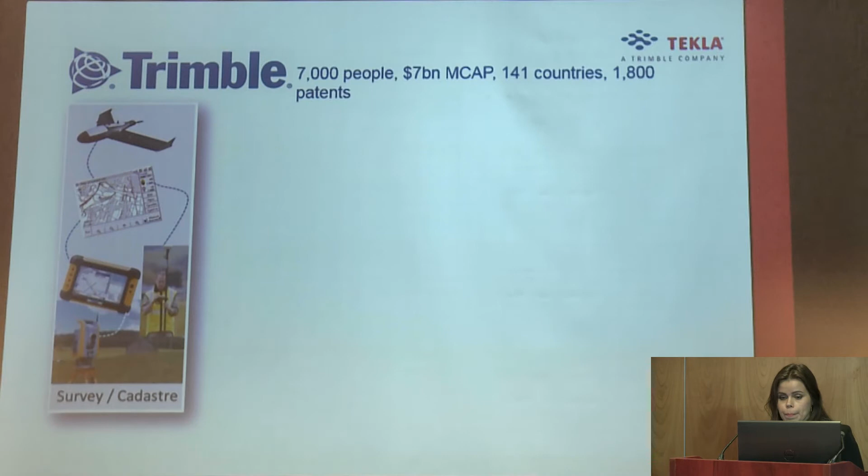So first we'll just talk a little bit about Trimble, which basically owns VICO and Tekla. It's a very big company in the US. They are actually mainly known in Europe as a hardware provider. They have a lot of hardware, and in recent years they have bought a lot of software. So they have heavy civil, agriculture, surveying, and GPS devices. Now they're trying to combine the office and field for construction, and they're really trying to focus on capturing the data on the field and bringing that to the office and to the job site so that there's some benefit from having the 3D models and all this data.

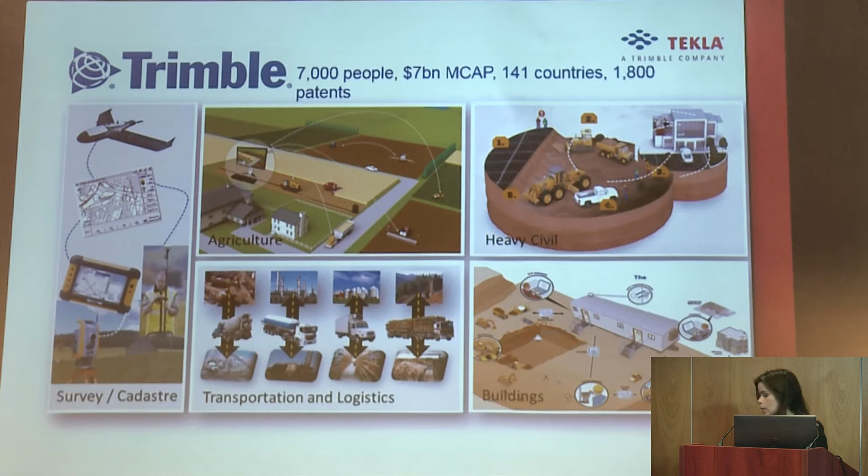So we will be concentrating on the building side of Trimble. Vico Office is probably not a very well-known software yet over here. It's actually originally developed in Finland, and we have many large companies that use it in Scandinavia as well as in the US.

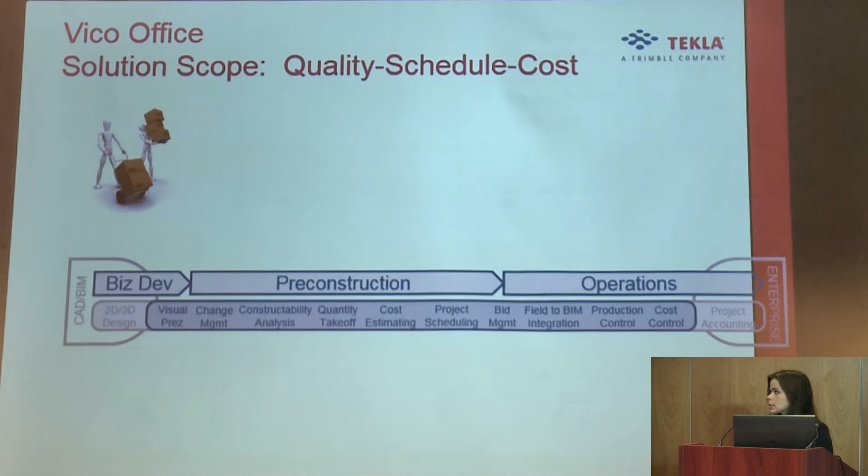And we talk about the solution scope. How much do we do? We actually cover a lot of ground. So if you're talking about bringing Vico Office into business development, we can start from high-end cost estimation and work all the way to cost control and be the link to project accounting. So we can basically replace 5 to 15 different software. And the nice thing about Vico Office is that everything is integrated. So if you bring in a new 3D model, our cost and schedule is automatically updated because everything is integrated, since we get all of the quantities from the 3D model. So we have constructability analysis, quantity takeoff, cost estimation, scheduling, and we can even link to field devices like the Trimble Total Station.

I think one of our best features is production control, actually making sure that the schedule you did is going to be the schedule you finish with. So you're constantly controlling the schedule to stay on course. You're steering the ship before it even hits a rock or anything bad happens.

So there's a lot of data, and we always want to make sure that it's available and on time, and it's actual, and everything is integrated, and different areas in the office or in the field can use different parts of Vico Office.

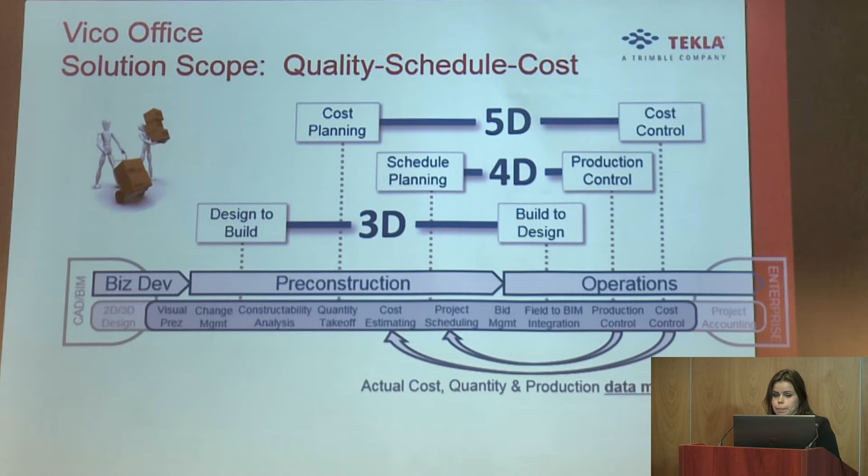I'll talk a little bit about how to combine VICO and Tekla as well, since Trimble's strategy in the long run is to integrate a lot of their software and hardware. We can also already work with VICO and Tekla together.

We can bring in the 3D model from Tekla, and then we extract quantities from the Tekla model. We create locations for location-based scheduling, which we'll talk more about in a minute. And we then link that information to cost as well. And we create tasks to make a schedule, and then we can even visualize it in 4D.

Then we kind of combine forces with Tekla. After that, we can do the general scheduling and controlling. In Tekla, you go into the object-based, weekly installation order, so you use Tekla in the specific way that it's meant to do. Vico Office is more of a tool for everybody, and we go into the general level of things.

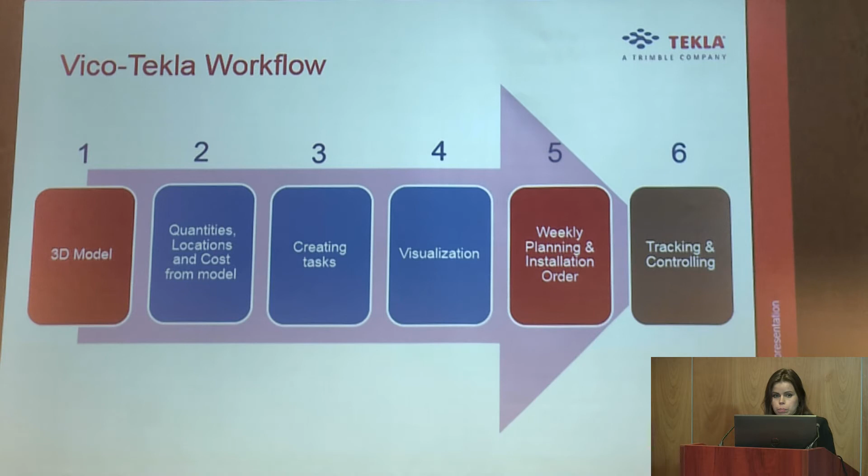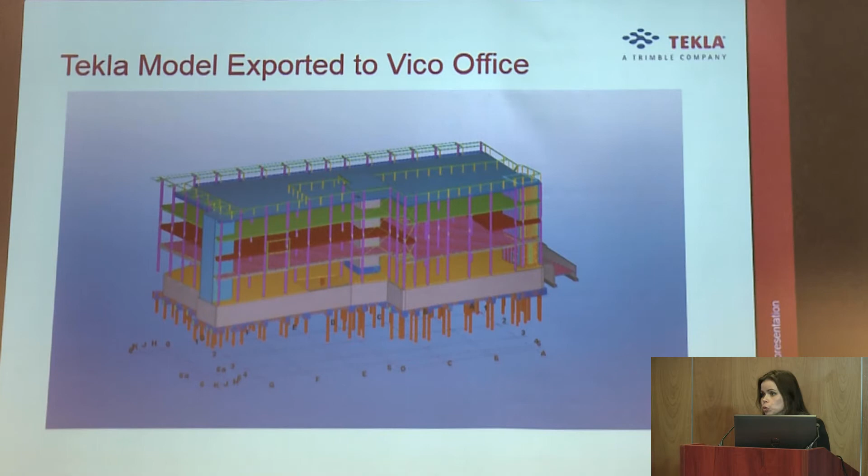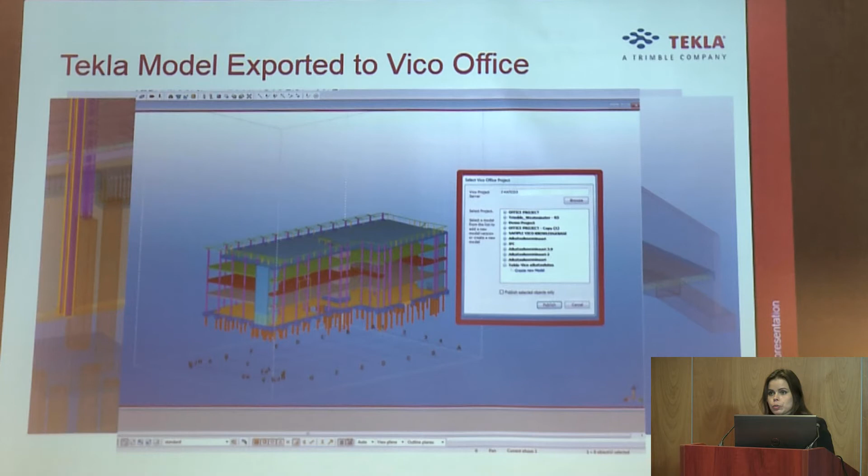So let's go see how this works. Here we have a Tekla model, and that's basically exported to Vico Office. In Vico Office, you can also use ArchiCAD, Revit, or IFC, so you don't have to have a Tekla model to use Vico Office. After it's sent to Vico Office, to the specific project that you want, it's opened in there, and we start extracting quantities from the model.

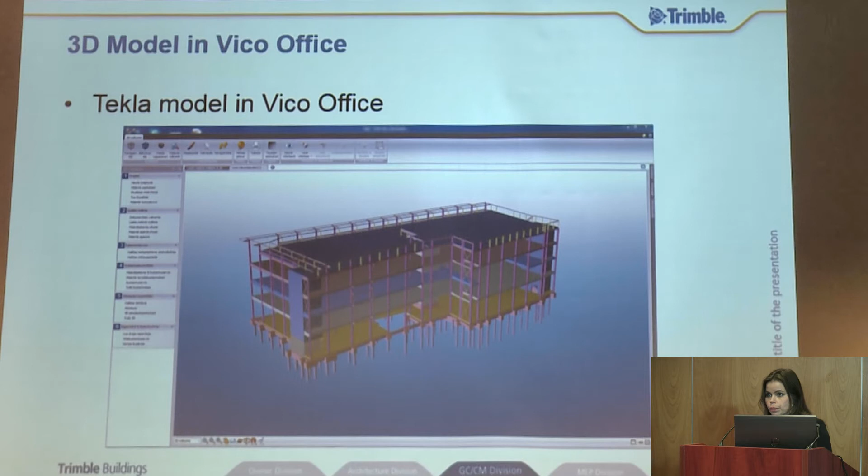Also, one of the best tools, I think, in Vico Office is something we just spoke about: how do you detect change? Managing change is something VICO does very well, and it's a handy tool. You can also bring PDFs to the document controller, and you can visually use a slider and see these differences. Trying to do this on a piece of paper is a little bit more difficult.

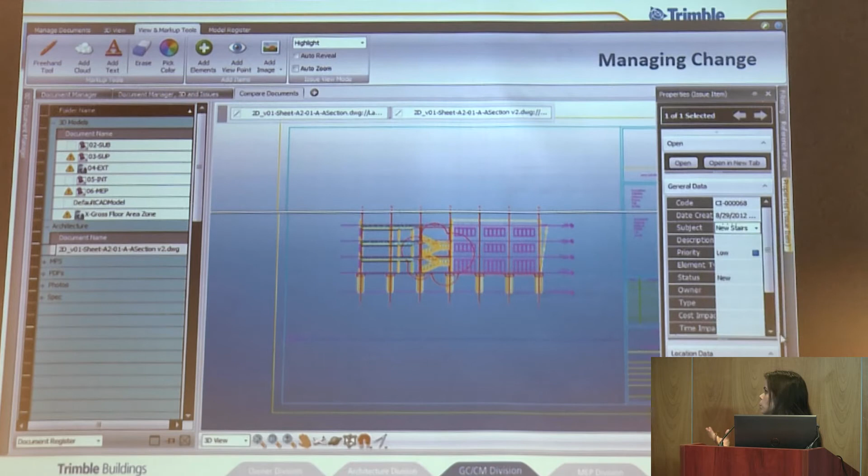So you can just mark it with a cloud, and it will automatically take a snapshot and create an issue out of it. And then you can come back to it later and see, okay, was that approved? Is it in cost? Has it been scheduled? So this is a great way to manage change and use as a collaborative tool.

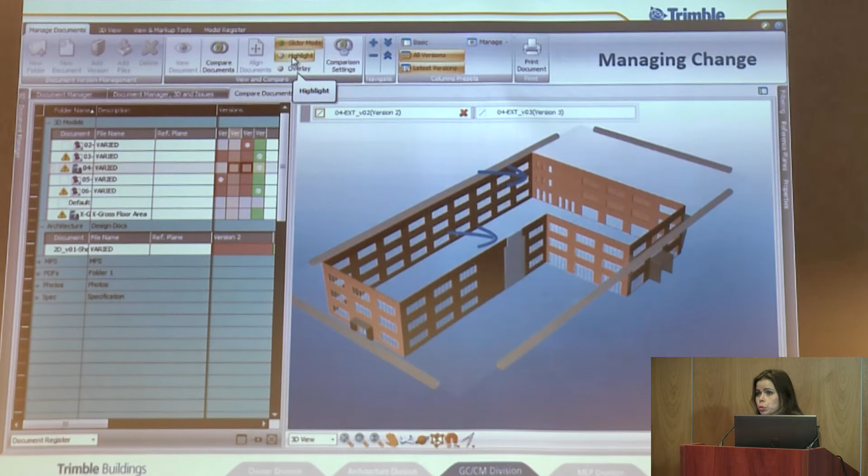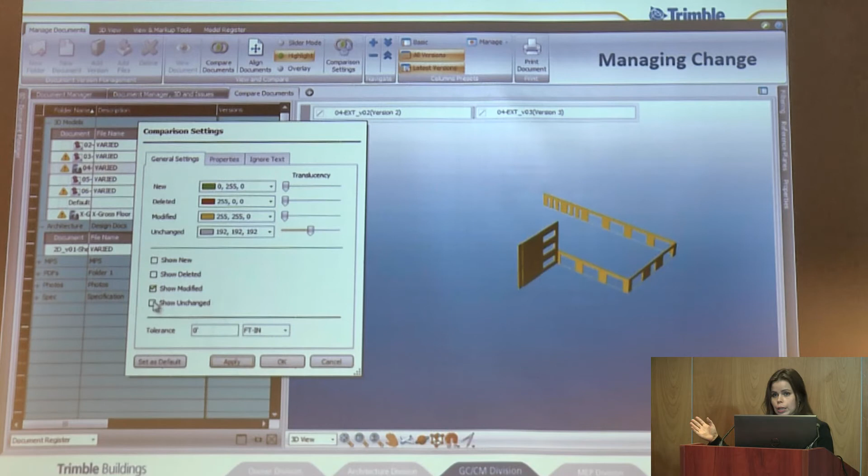In addition to this, you can compare 3D models. So if you have two versions of a 3D model, you can use different modes to visually check. This is a great tool, again, in a weekly meeting, explaining change to an owner or a person who might not understand anything about drawings. Here you can see in different colors: red means something was deleted, green is new, yellow is changed. And again, all of this, you can take a screenshot out of it and create an issue.

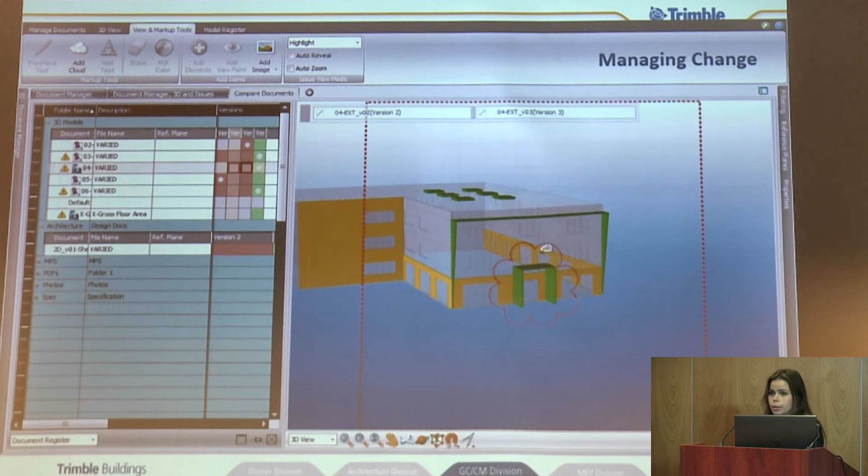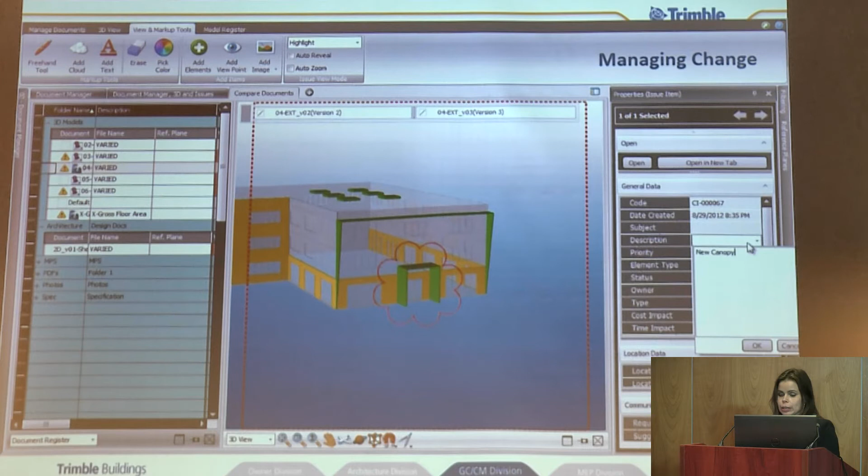So this is a data bank for all of your PDFs, 2D documentation and 3D models for that project. And again, you create an issue out of this, and it will be in the issue list, and you can come back to it later and make sure that this is taken care of.

And just a quick screenshot about if you created an issue, you can assign it to a person. You can even create a little chat or discussion saying, okay Mike, did you check this? Yes, this is approved. So you have little timestamps to see how something was handled or if something was taken care of.

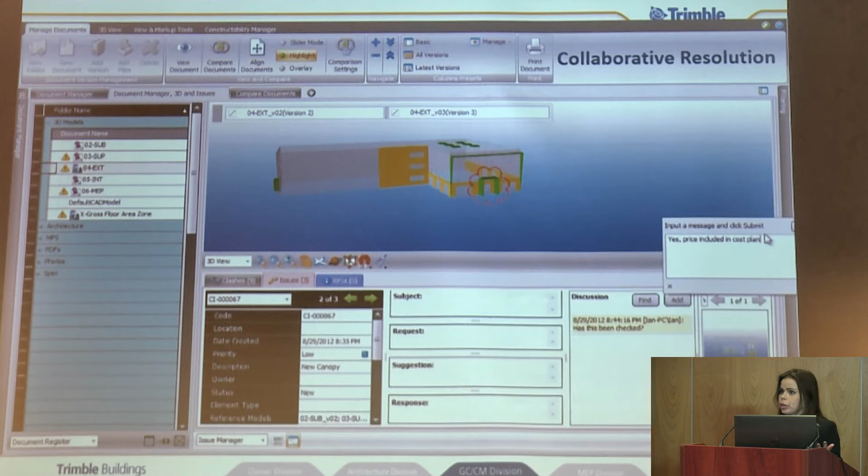So after you check the different versions of models or PDFs, then we want to start extracting those quantities from the models. The elements we get from the model provide us the geometry we need to calculate the quantities. We just don't, for slab-on-grade for example, count that there's one. We want to know how many square meters, how many cubic meters, everything that we can calculate from that specific element. And we link that data into our cost plan.

And this costing data is something that you can have as a reference project, basically, where you can have a recipe database for how to make something. Because at VICO, we try to find those things that you can actually reuse on most projects you have, because a large part of what you do every time you bid a job is basically the same things. Every job has a substructure, it has walls, so we're trying to reuse that information we used last time, so you can create a cost database that you can use to link to those quantities from the model.

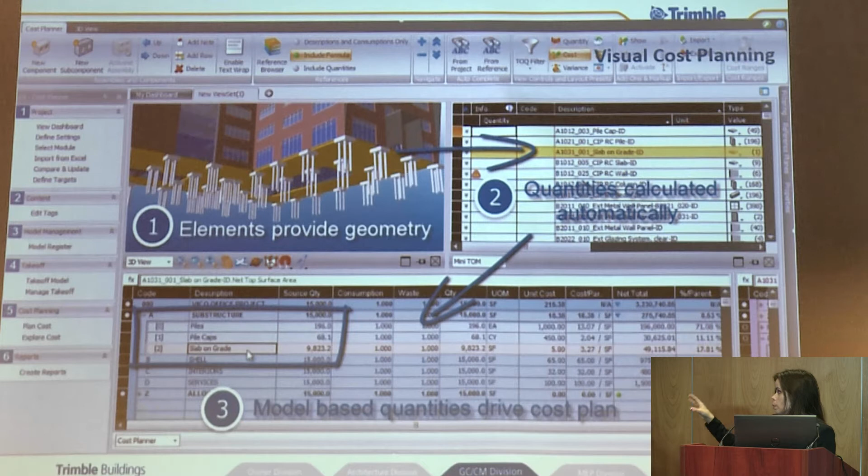In the next screenshot, you can see how it's done. So if I have highlighted the foundations over there, it will show in the model what has been linked to the foundations, and you can see those items. Those are different elements that are linked to the model and also to the cost plan, and you can see what kind of quantities are linked. So this is cubic yards and square feet. Those are the items that we're using to drive this cost plan.

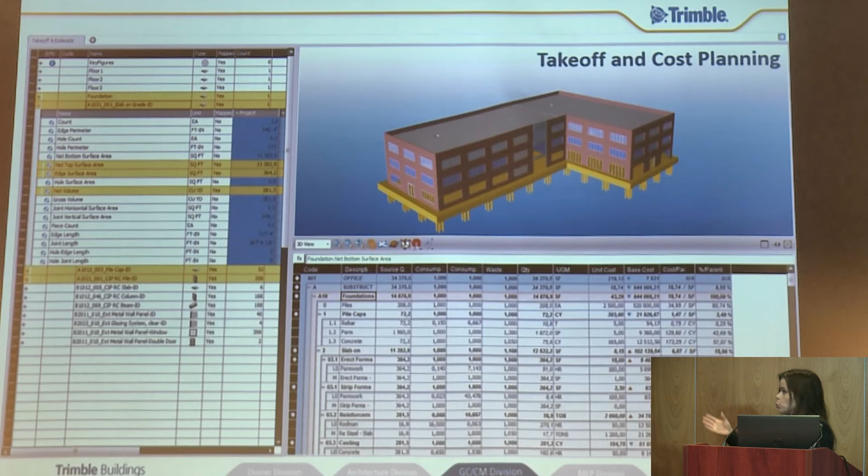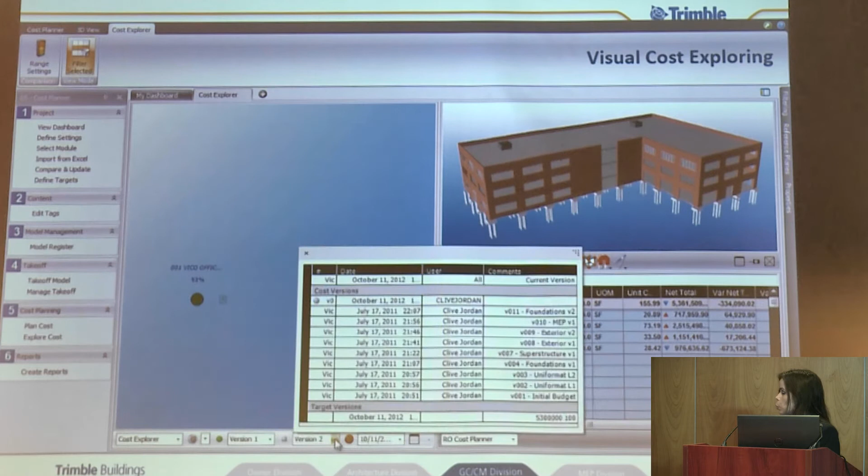So one of the other features that a lot of owners and people like to see is what kind of differences there are in different models or cost versions. Because in Vico Office, you can do multiple cost versions. You can bring in another model and create another version. So then you could compare and see which of those model versions is more expensive, or you can compare it against your budget. So we have a little green light, red light thing going on here.

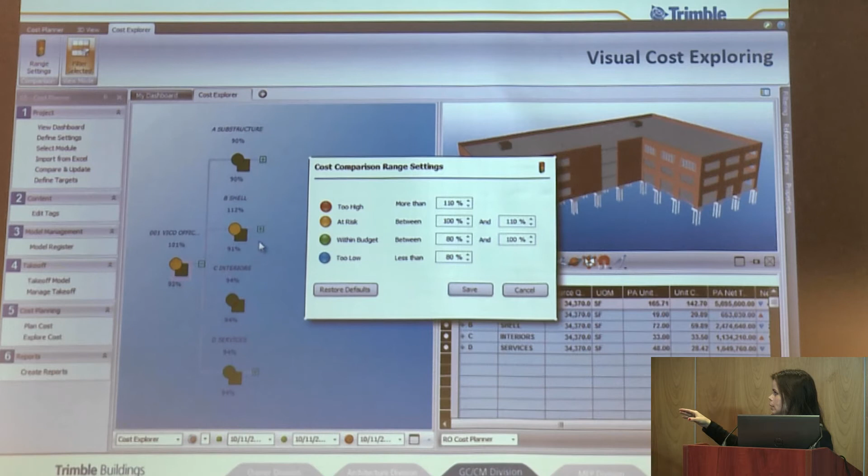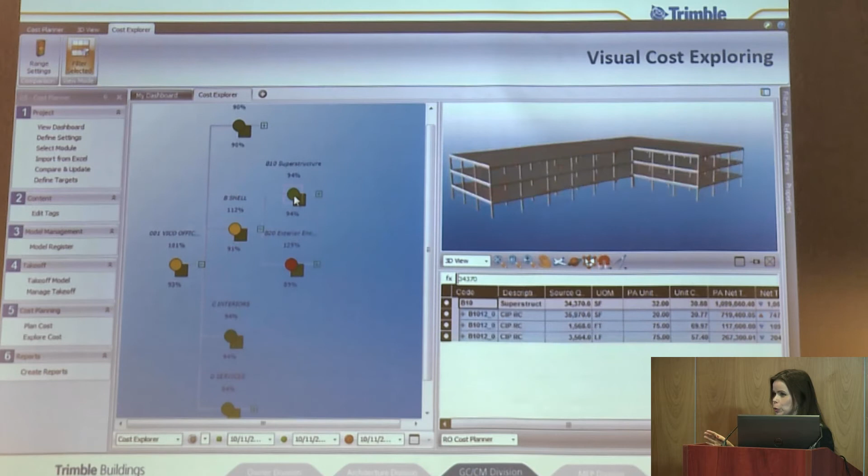So basically, this is just like a tree structure. You can go, you have the whole project. There's something in yellow, let's go see, there's something in the shell of the project that is telling us that we're over budget. Yellow is not really that bad yet, but let's continue. If it's red, you know that you're over budget. So you can continue, and you can see that there's something in the exterior, and you can go to the specific item and pinpoint the line that is causing you to be over budget.

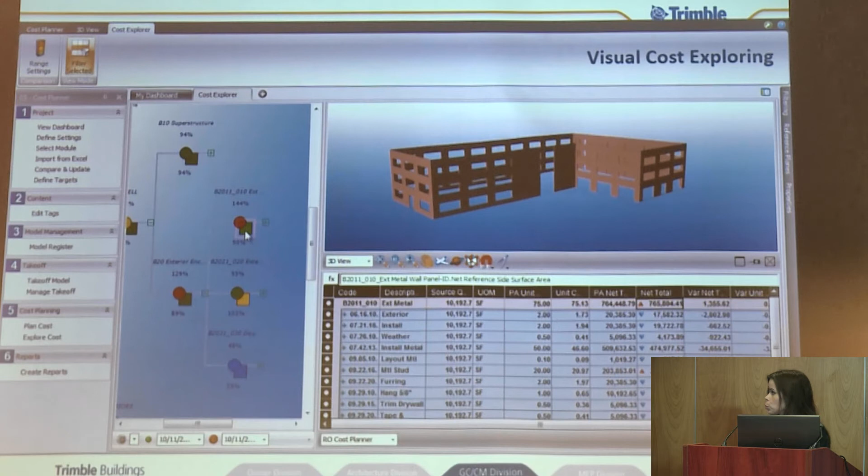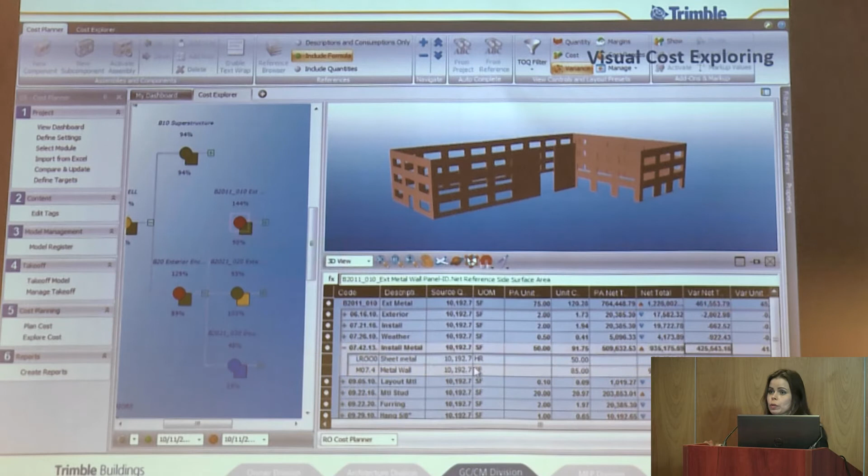So again, this is a great visual tool, but also you can see the numbers. You can see that, okay, the exterior metal walls were causing this for you to be over budget, or this version to be more expensive.

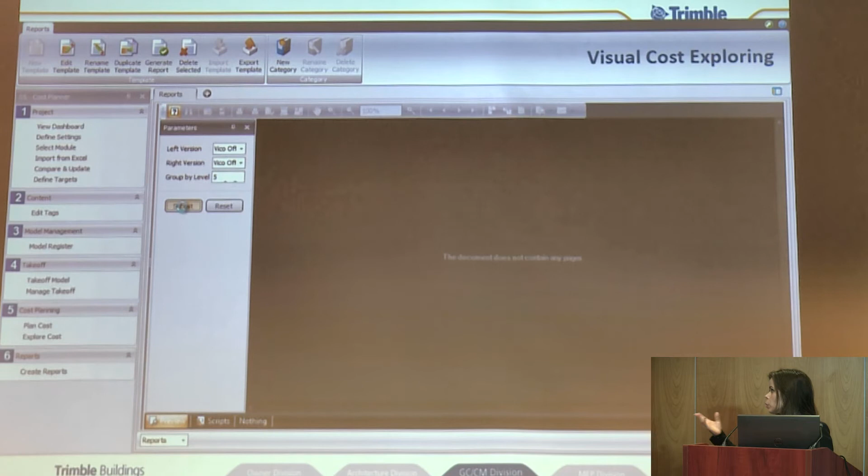This is a tool to dig into those differences. I think one of the great features in Vico Office is reporting. We have a reporting engine that you can basically use to create any kind of reports you want. Over here we have a sample report where you can compare two different versions of a cost plan.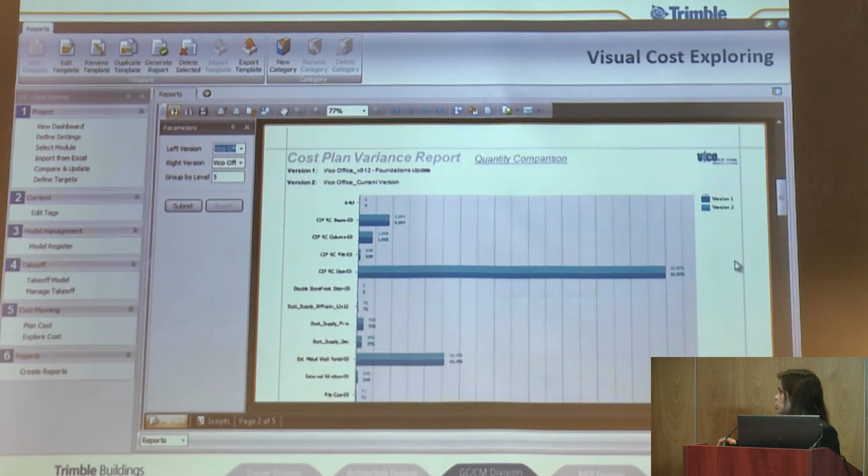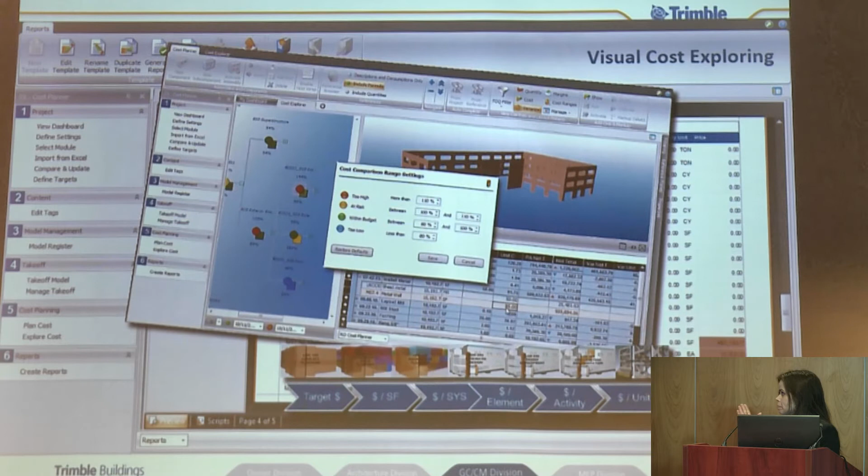You can run this in PDF or take it out to Excel, so you can hand this out to anybody and say these are the quantity differences, these are the price differences. Red again is over budget, and the sky's the limit with our reporting. Those are just some examples of what you can do with our reporting engine.

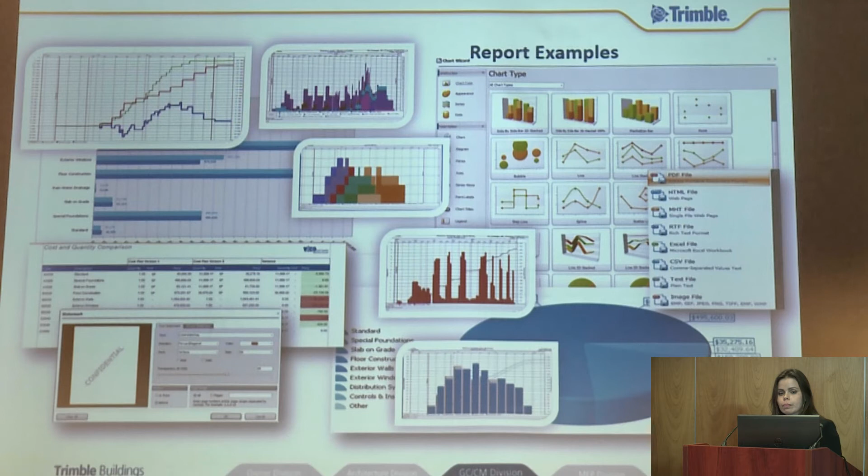So now that we've looked at the models, detected some change, and linked those models into our cost plan, the next step would be to do some scheduling.

In Finland and Sweden, for many years, location-based scheduling has basically been the standard. Is location-based scheduling or flow line scheduling familiar to anybody? No? Okay, well I guess not. Nobody knows flow line scheduling or location-based scheduling, even in the universities? Okay, well then I better explain.

Location-based schedule planning is not a new idea. It was actually used to build the Empire State Building. For some reason it was forgotten for many years. The idea is to cut up your project, instead of thinking of it as one big box, into sections, areas, and zones. The goal is to create work that is continuous and flowing, instead of having little jobs here and there with stops and starts, which seems to happen a lot on job sites, I've heard.

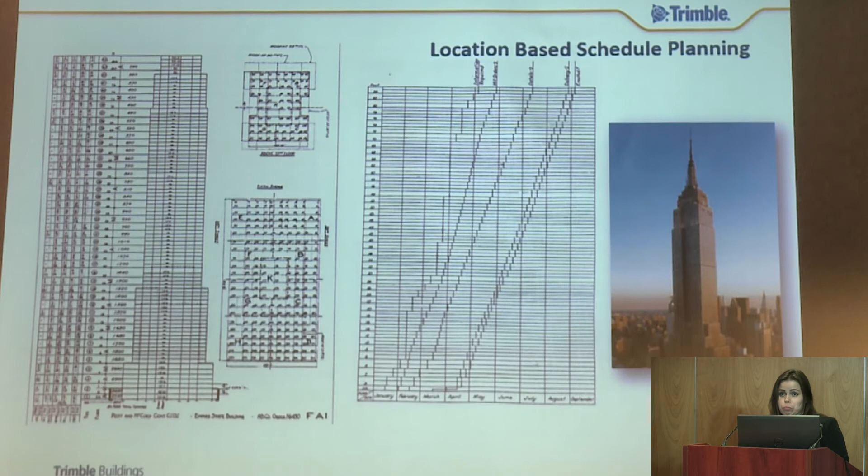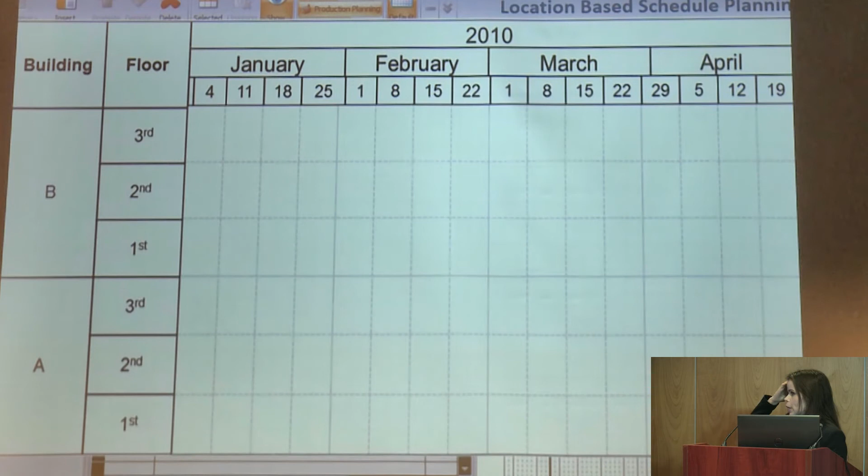So let me show you a little video to visualize this. Here we have, basically like in MS Project, a calendar, but on the other side we have locations. We have building A and B, building sections and floors, and then dates. We have lines for tasks just like in MS Project, but you can see they're on an angle, so you can see that on the first floor of building A on February 8th, there's work happening.

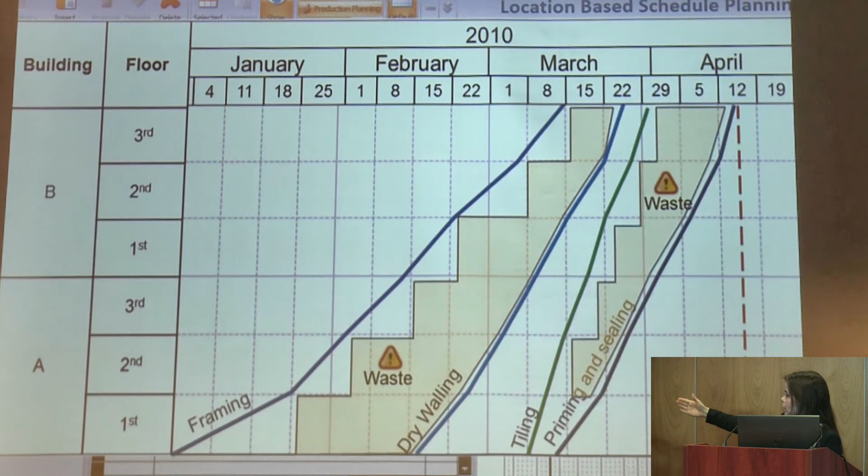And you can see right away that there's waste happening, stops and starts, because we want those lines to be as close as possible, with just a little buffer in case there's some delay, to ensure that most locations have work happening all the time.

This has actually been proven: when you use location-based scheduling, you can take out 10 to 20% from your schedule duration. That's because we're trying to find locations where we can do work and bring in crews. On each location, we only want to have one crew working, because if somebody's installing windows and somebody else is doing floors, it might be a problem in that location.

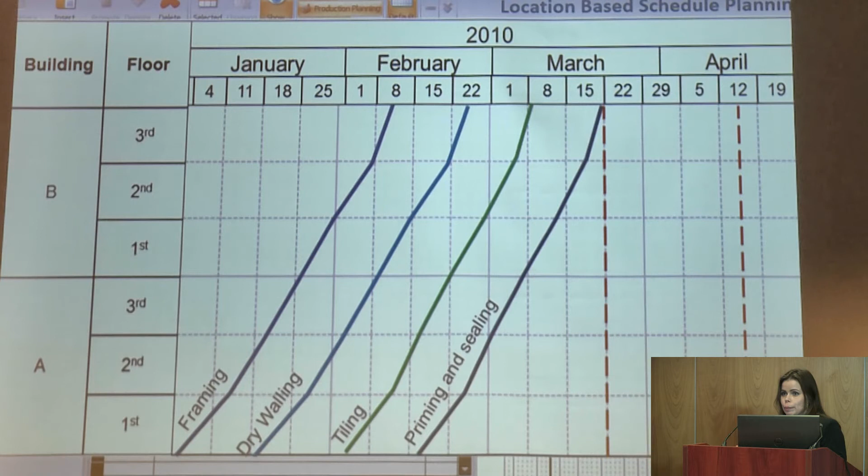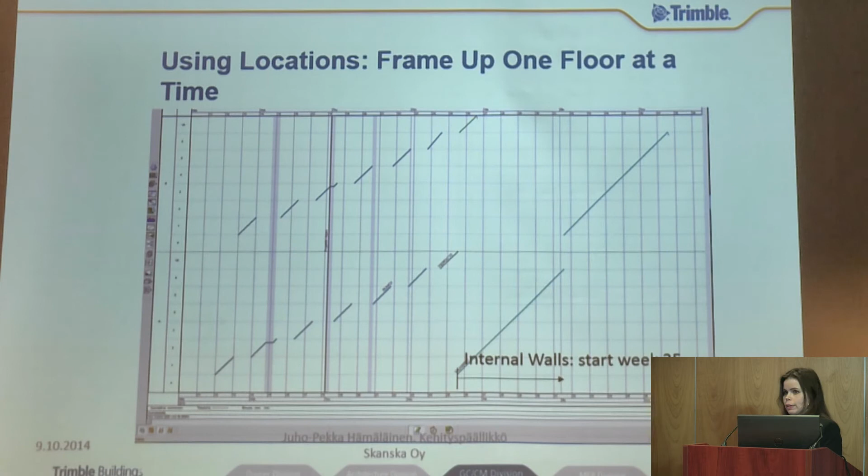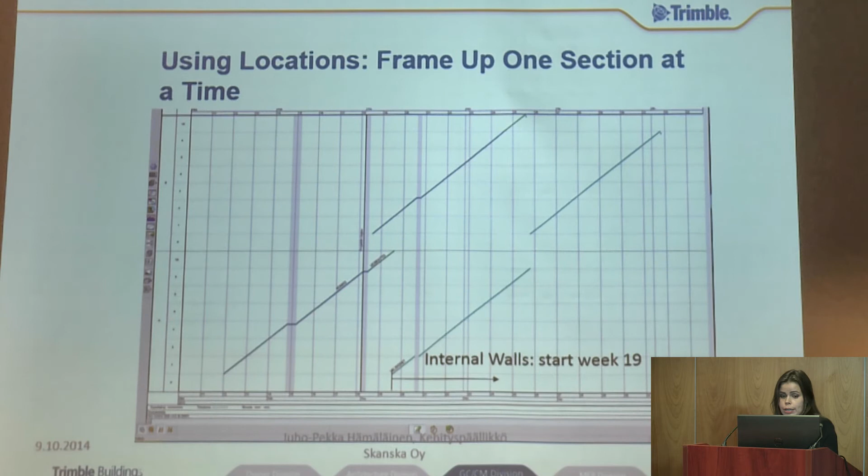So let me show you a couple of screenshots. Let's say you have locations and you're just doing framing one floor at a time — little jobs here and there on each location. Instead, let's try to frame up one section at a time, making the framework continuous and moving from location to location smoothly without stops and starts. That allows the next job to start earlier, because we make the previous task go faster and smoother.

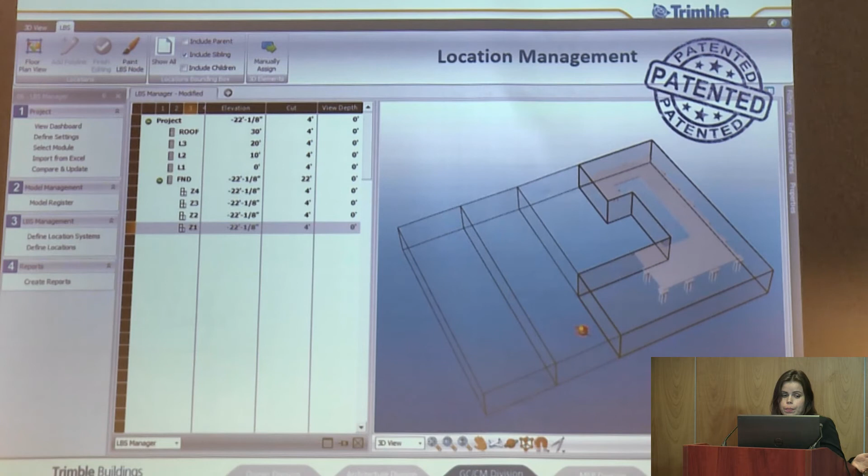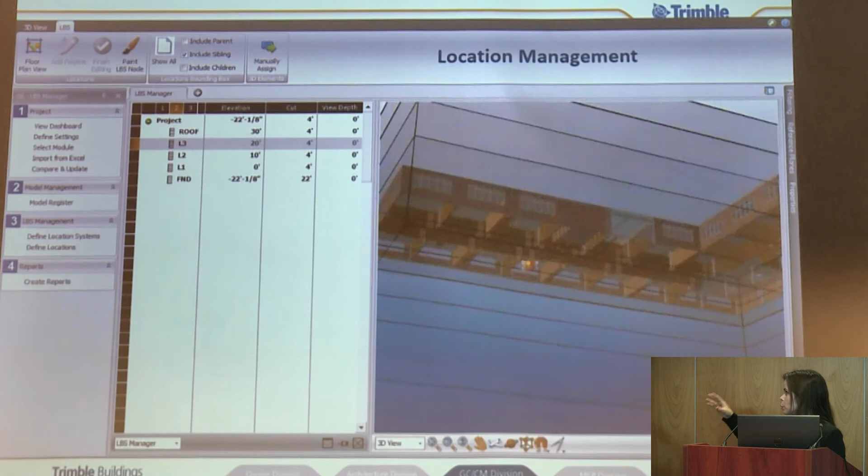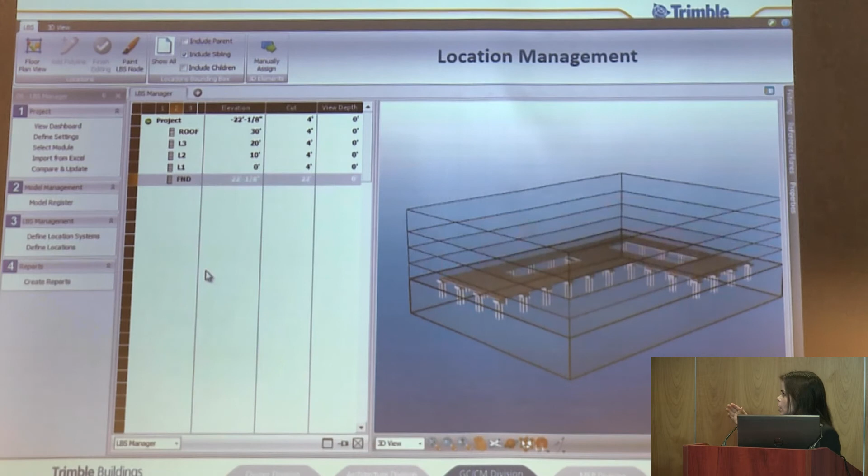Now let's look at how we can set up those locations in VICO Office. Basically, we want to cut up the model — we're not actually destroying the model, but visually cutting lines into it. You can see we have different floors here, which we can bring in from the model itself. In VICO Office, you can look into the model just as you would in Tekla or other 3D software, but here we're isolating the foundation.

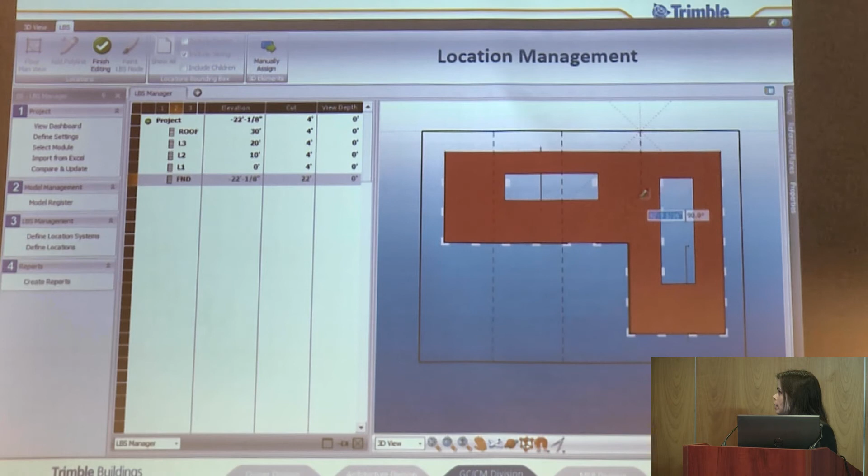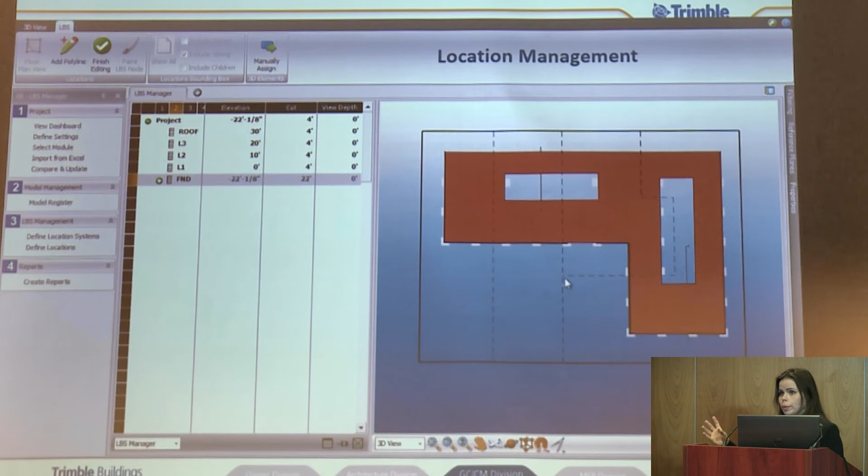Now we want to cut that slab or foundation into a couple of pieces so that we can have tasks in different locations. So basically we're just drawing lines here to create these zones, and when we press enter, it will calculate how much of that slab, or how many piles, are in those locations, and how many square feet or cubic yards of concrete is in each location.

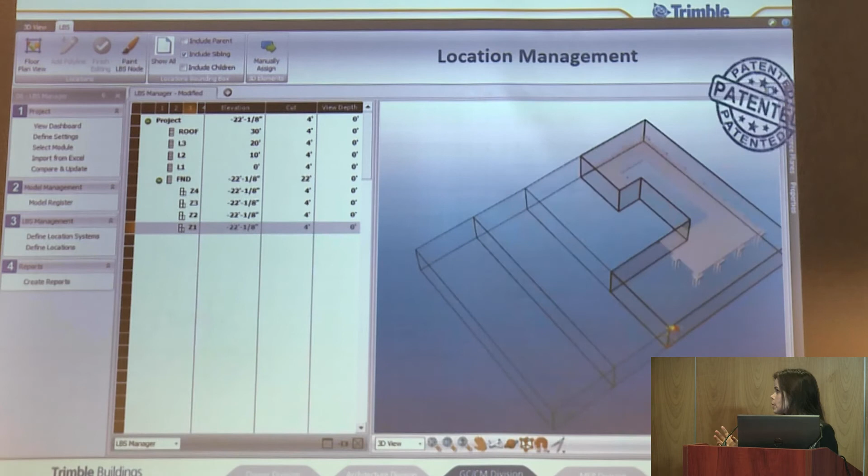So then we have quantities per location, and that is something we need for location-based scheduling. And purchasing as well. Good point, yes.

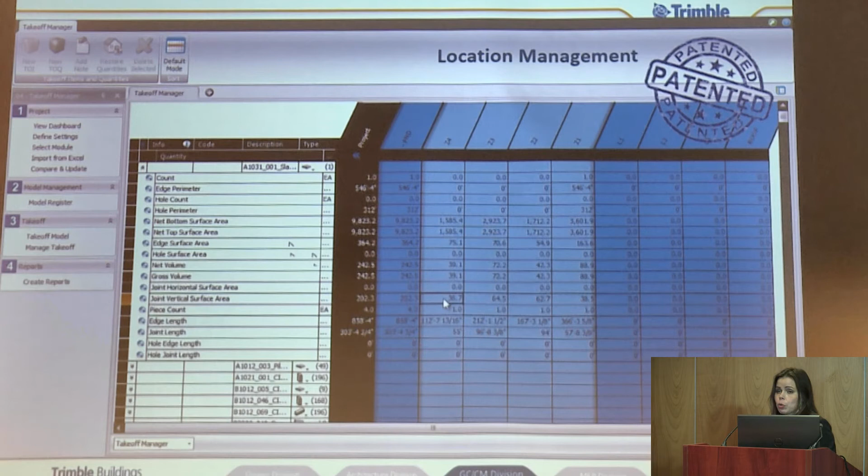So now that we've cut up the model, we can also see those elements in these different zones, how much of what element, like the slab, we have—75 is its surface area in that location. So you can right away see how much material you need to order for that specific area you're working on, and also get enough crews there because you know how much work you will be doing in that location.

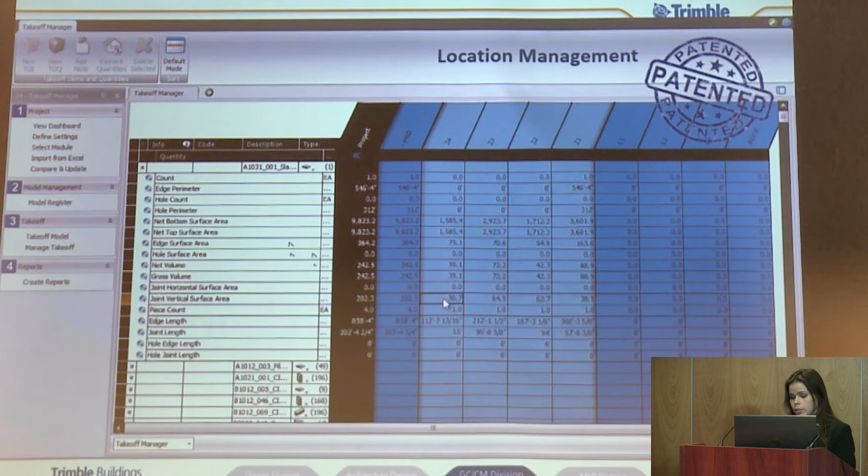The general idea a lot of times when cutting up locations is to have work there for 2 weeks. But of course, if you're doing foundations, you might want 3 locations, while if you're doing finishing work, maybe you want 10 locations. It's possible in VICO Office to have different locations for different kinds of tasks.

So again, we have locations, we have quantities, and what do we need these for? We need these to have an intelligent task and duration. Because that is basically what we want—we need certain kinds of information to know how long our schedule is going to be.

We need to know what resources we have, the quantity we get from the model, the consumption—how many hours per unit we need to install something—and how many resources we have, how many men we can have on a job site, and how many hours per day they work. So if you have more resources on site, more hours, different quantities, or different consumption, then VICO Office calculates the new duration for that task.

That's why we think it's intelligent—if any of these variables change, so does our schedule, and then you can work with it again. So does this make sense? Okay.

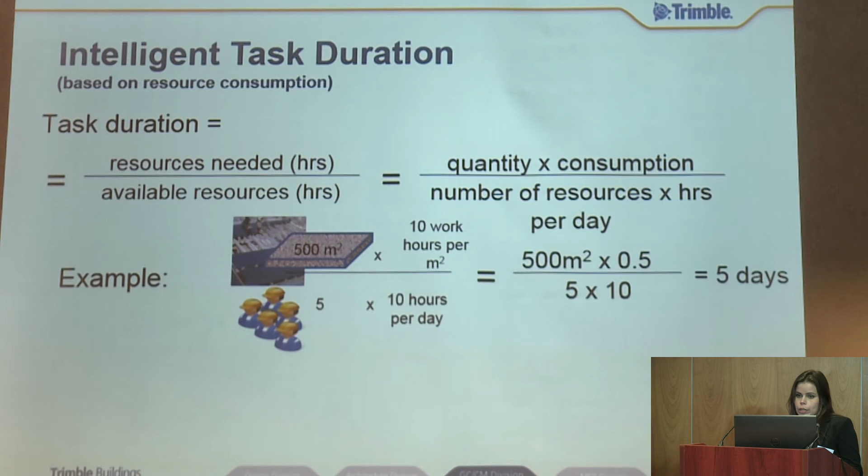So let's go then to some other little videos, just to show you how this is created in VICO Office.

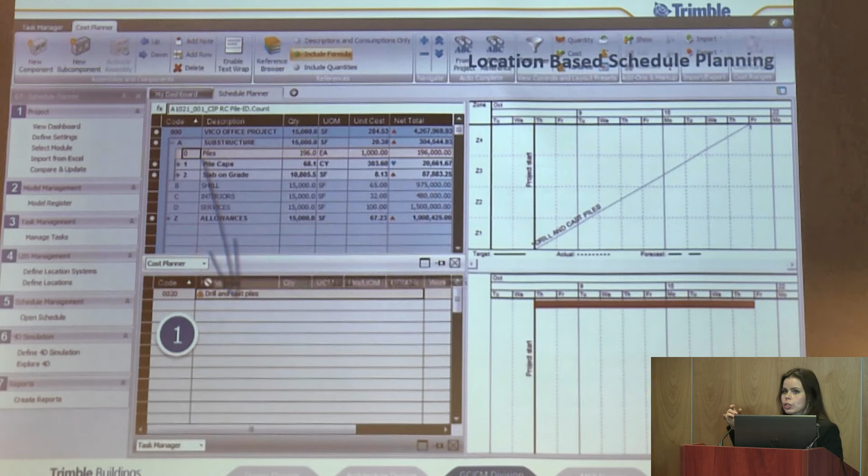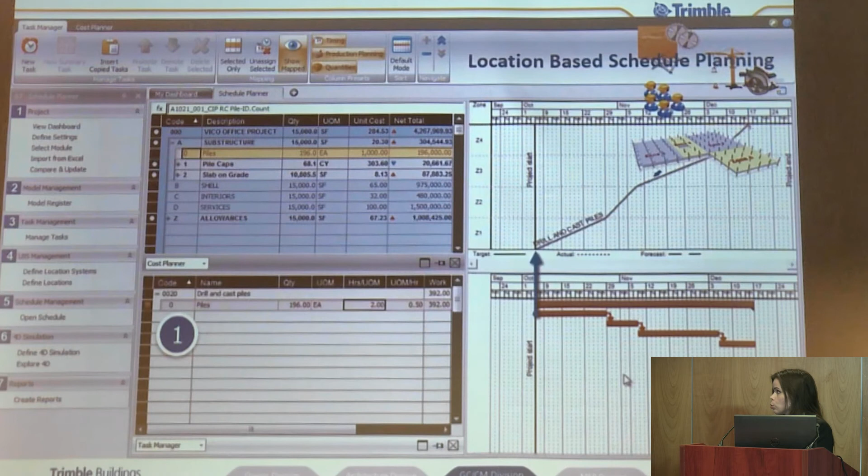So over here we have the blue one—I'm not sure if you can see in the back—it's the cost plan. Then we start creating tasks here, and we're starting to link those cost line items, which have the quantities from the model, into these tasks. So we're loading the information—how much, and the locations—in there already because it's cut up. And VICO will start creating these tasks.

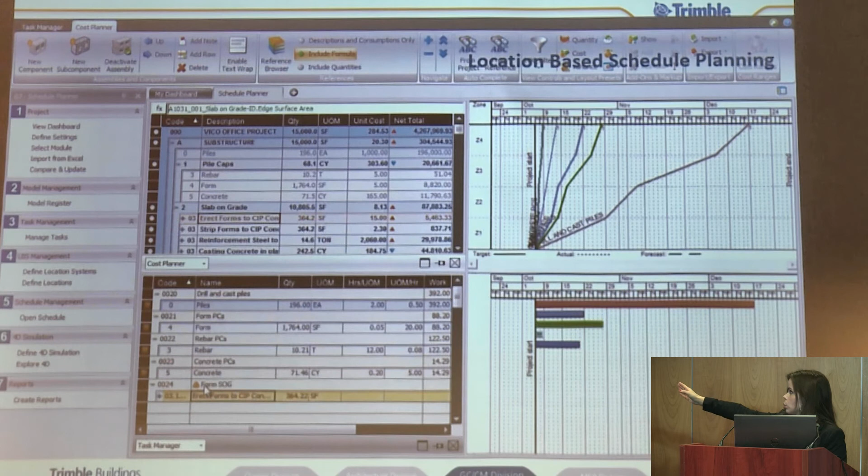We also have the Gantt chart available if you like that—in some places it's a good tool. So it's possible to see your schedules in the traditional Gantt chart as well. Both schedules start drawing lines, and the big difference again in VICO is that we have the location in this flow line schedule on the left.

After we have done all of these little tasks here, you can see that they all start at the same time, which is probably not a good idea, because we were talking about wanting to have one task in one location—now we have 10.

So the next logical thing would be to do some kind of dependencies on these tasks. That's easily done just by dragging different tasks on top of each other, and it will make a finish-to-start dependency. You can see how it affects our schedule.

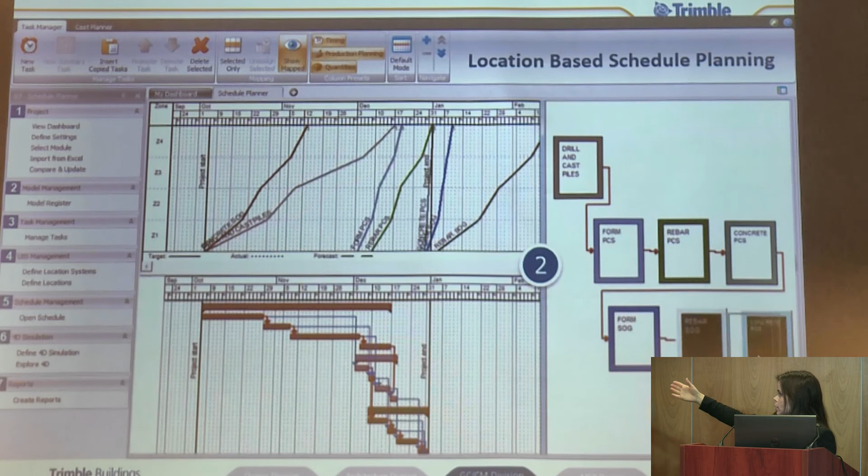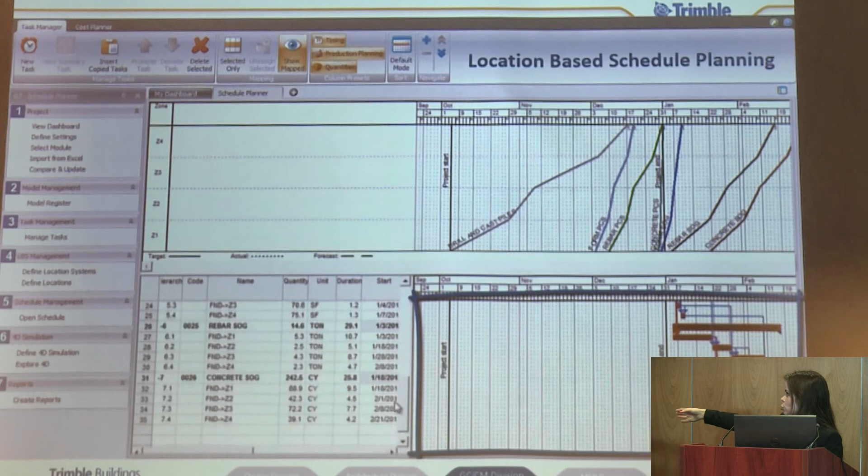So if the first task is late, it will push the rest of the tasks to be late. You can see the same thing here, but you can't see in the Gantt chart that this is a bad schedule because the lines are there again. It's a waste of time.

So now again, we can force it to be a faster task, and now it's telling that instead of one resource, we want 4 to finish at that time. So now we're trying to align all of these tasks to the same speed—some might have less resources, some more, but at least they're all going through the locations at a similar speed.

Now we've compressed those to be pretty close, but we want to give them a little buffer in case something's wrong, and we're still way ahead of our previous schedule. This is, again, something that you cannot see in the Gantt chart.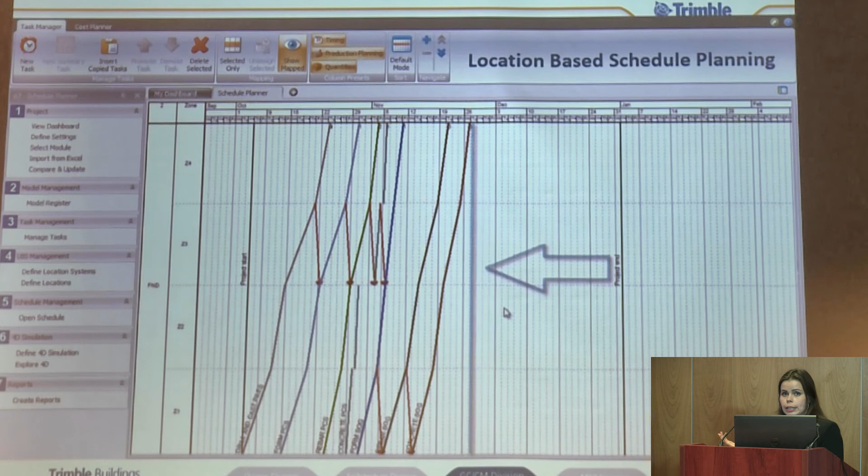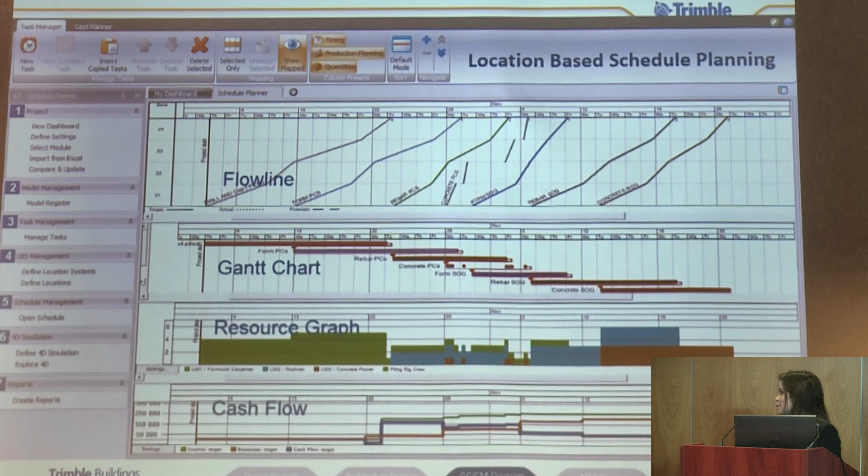And again, when you save—surprisingly, in construction also, money is important—you can also see the resource charts in VICO Office. And here, as a little bonus, we have the 4D.

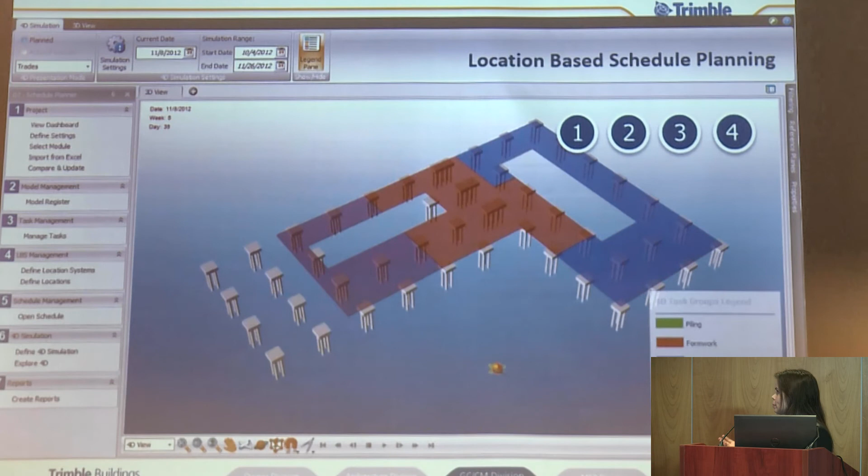So you can play this on a weekly meeting or to the owner or anybody who needs to know, is that how you're planning to do this on location by location. It's a nice visual tool for people who might not understand much about construction.

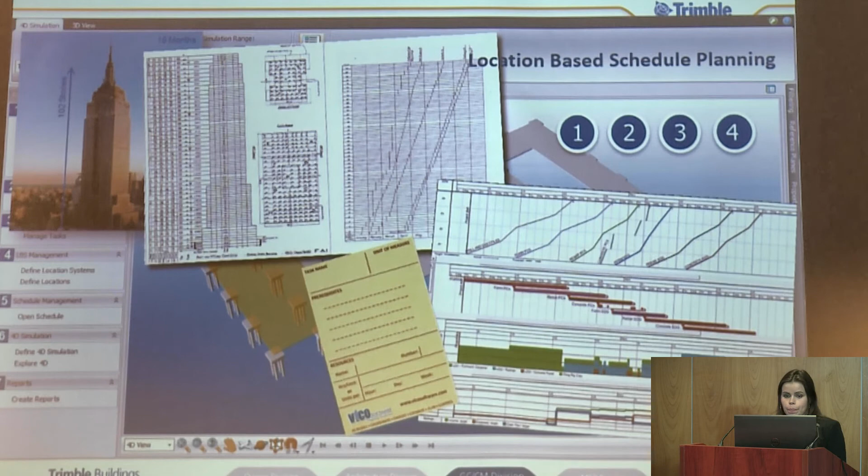And you can also do the simulation with basically the schedule that you already have. You can do an actual simulation, and we'll jump to that next.

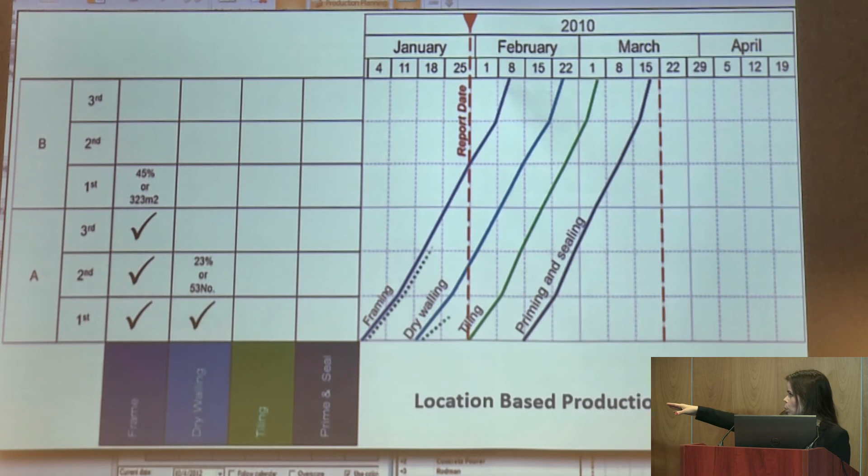So after we've created a nice schedule, as we all know, it rarely is your final schedule. Now we're going to start the construction and see how well we keep up with the schedule. Oftentimes we have little hiccups, and the job is not going as well as we thought. So now we're marking for each location, okay, that's finished, that's 23% finished, or that's 323 square meters there.

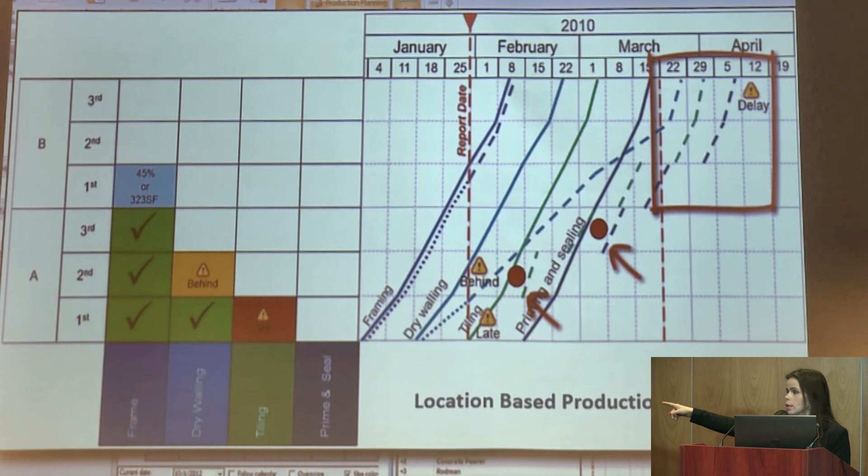And it's going to start putting these little dotted lines here. It's showing us what the actual speed is. You can see in the second task already at the bottom, we're late. And now these other lines are predicting when we're going to finish based on the production speed that we've had.

So we can see right away after a week or two that we're basically in trouble. Now we can tell VICO Office that, okay, we've had one resource on these. What happens if we bring in two resources? VICO is going to calculate again, and we have corrected the problem. Now we're close to where we want it to be.

So the idea is that you're kind of steering the ship all the time to make sure that you don't find out two weeks before you're supposed to finish the job that now we're three months late. This is something you should do once or twice a week, and VICO will then calculate the duration for you.

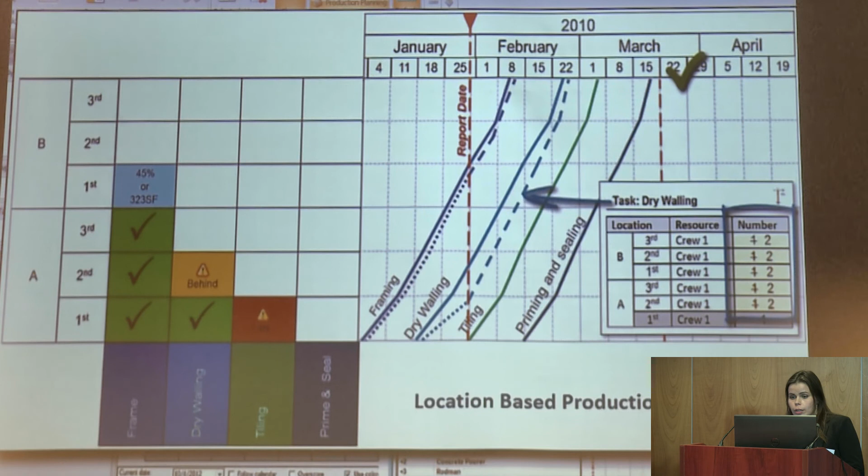And so we're almost done here, hopefully not too much information. But this is just basically video from the live software. Again, when you start putting in the actuals, it will start drawing the actual lines here, and you can always tell okay, when it stopped, when it started, how much was done.

And then we're going to be able to see that, okay, now we're late. What can we do now? In VICO Office you can also see what are the best options. For example, if you don't have enough crews there, maybe you can do 10, 12-hour days.

So you can see these what-if scenarios, what can be done. What if you bring in two crews, or what if you work weekends, or if somehow you can affect the production factor. All of these are ways to control, speed up, or slow down your schedule.

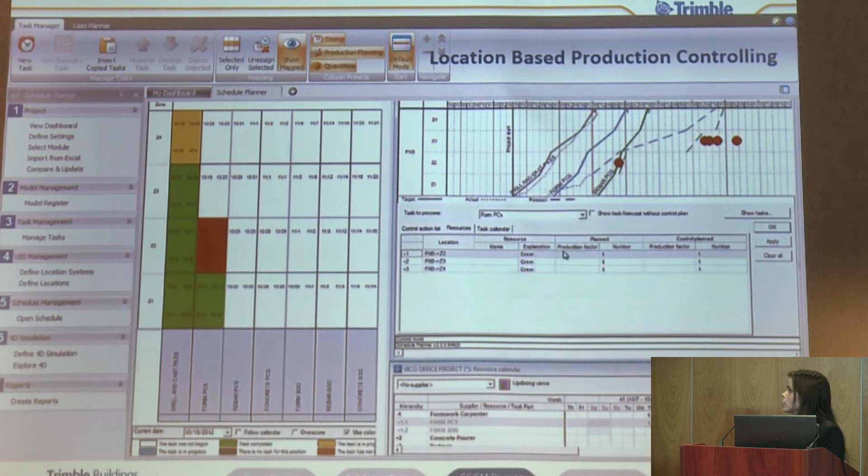And these little red dots here, they're also warnings that show you where you have these little issues, where these tasks will clash with another task. And this is where we can go and see what are the controlling options we have.

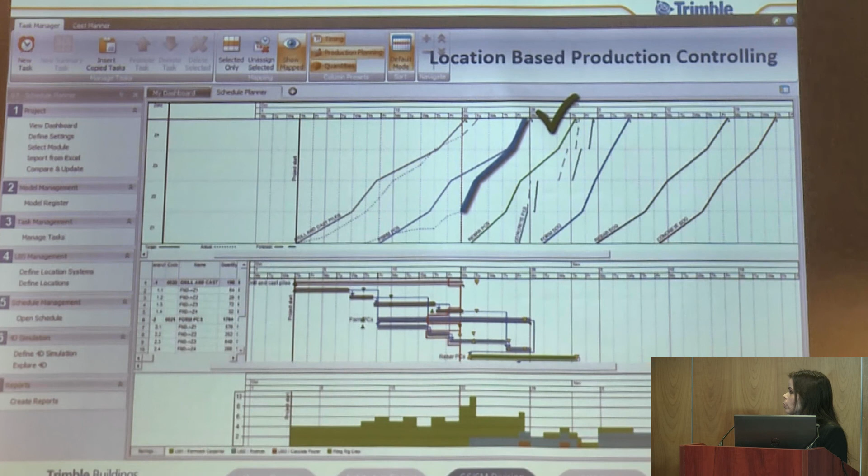So now again, we forced it to have 4 resources, and miraculously it fixed the schedule again.

And again, you can bring a lot of reports out of it. You can do reports for materials. You can align your resources, because that's one of the other great benefits of VICO Office, that you can level your resources so you don't have in one day 35 electricians, which might be hard to get. Maybe you can align them so that you need 8 every day for a period of time. So you're trying to basically take out the risk and help with decisions in VICO Office.

And I think that's one of the great benefits of VICO Office, to help you with those difficult decisions and basically reduce risk and hopefully save money as well.

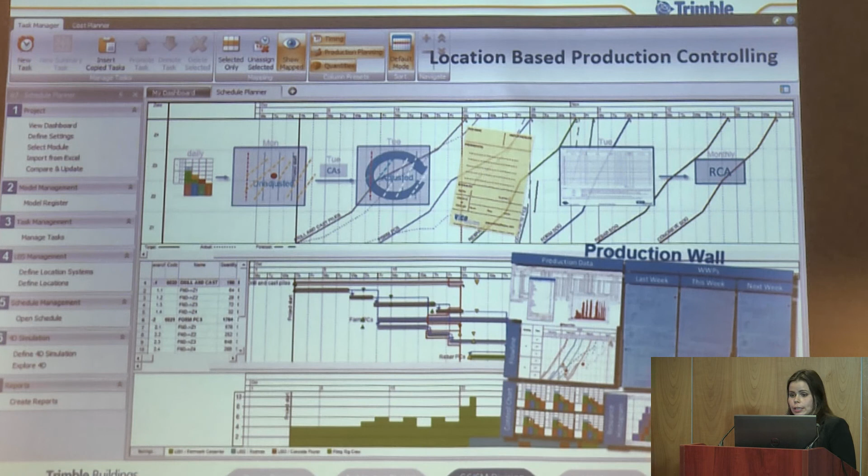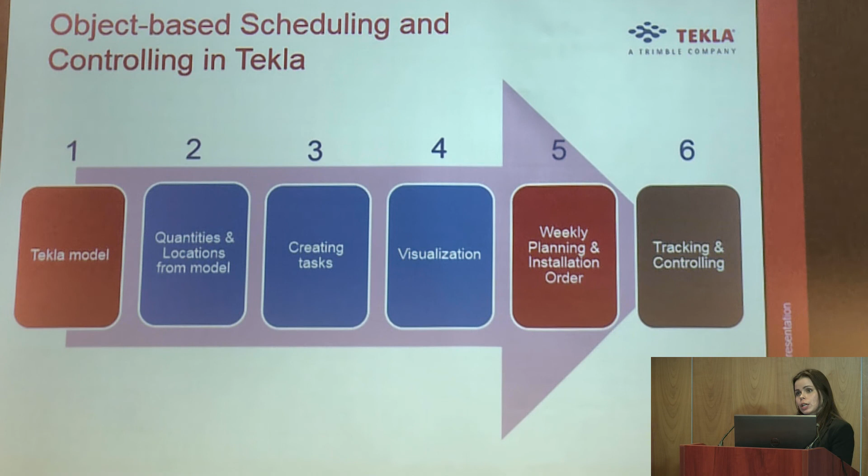And let's jump back then into the Tekla track. So now that we've done all of this in VICO Office, we've looked at the model, done the quantities, we've done costing, scheduling, and controlling. Now Sampo, my colleague, is going to show you guys how to continue from here and take that schedule into a deeper level with Tekla CM, and of course, on site, it's happening on site.

Yes, exactly. So any questions or answers if you have them? Interesting presentations. There should be questions.

Okay, okay, so at least now you can say that you know what location-based scheduling is. So next time I come, I better see some hands. Okay, thank you, thank you.